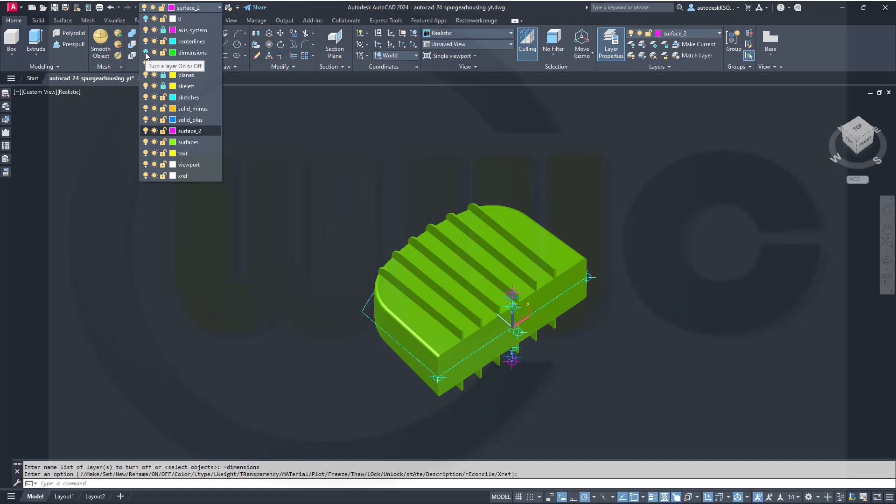Let's hide those solids here, since they're on a different 3D solid layer. Let's hide this one here. I will need a rectangle.

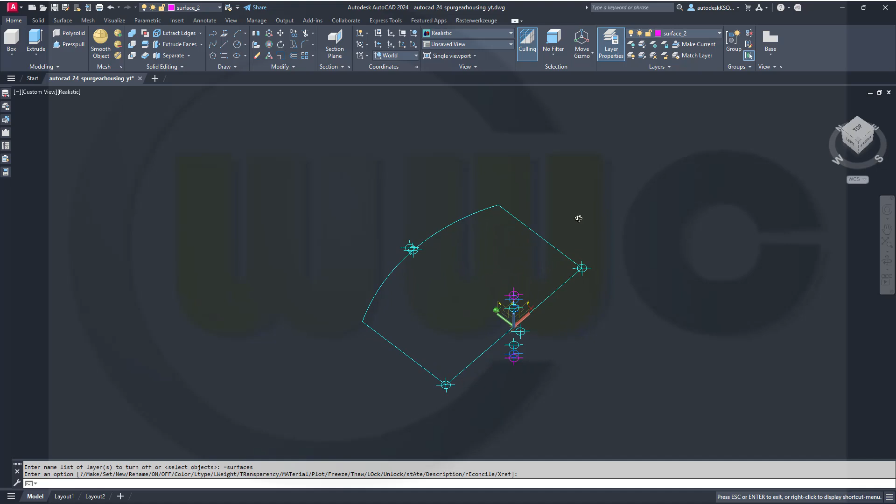My XY plane isn't oriented the right way, so let's rotate it around the x-axis by 90 degrees. Now I should be able to draw a rectangle, so let's go for our sketches layer.

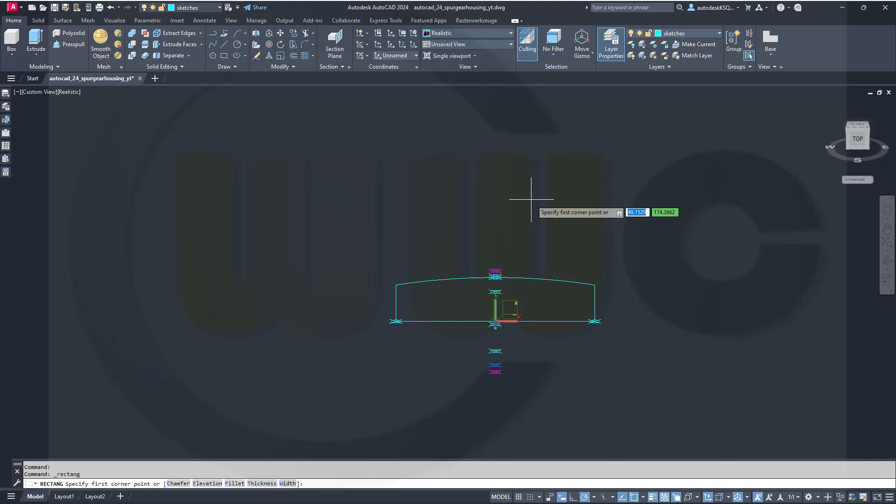Go for a rectangle. It should start at 0,0, and it should be 300 by 110.

Now this needs to move to a different point. Let's go for move, not copy but move. Right click, and the base point should be mid between two points, between this point and that point. The target point should be at 0,0,95, so hashtag 0,0,95.

Oh, I've got it wrong, it's minus 95. Let's move it again. Right click from this point in that direction, 2 times 95 would be minus 190 - but I've got the trace, so it's 190. Now it should be at the correct position.

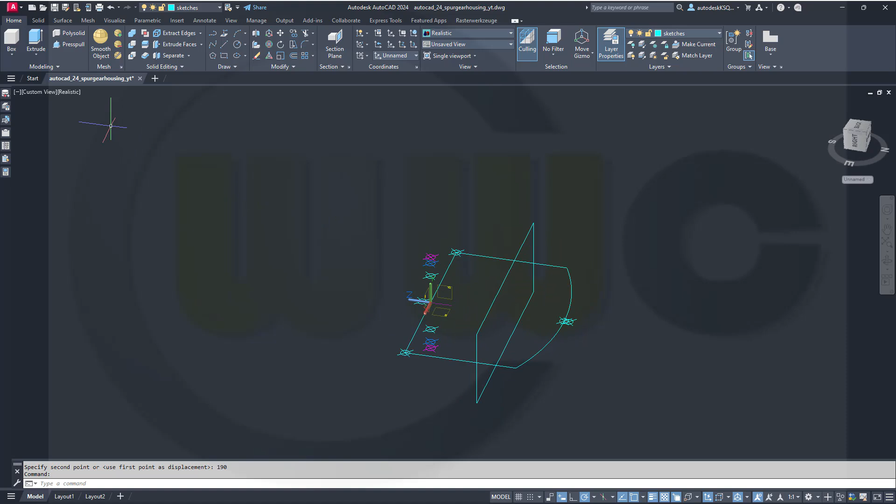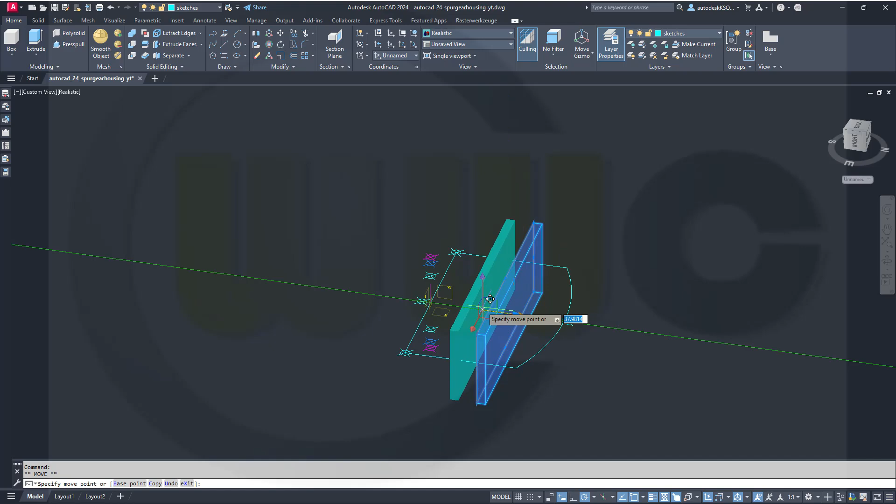Now let's make an extrude with that rectangle, right click, enter. It should be altogether 12, so let's go for 12. Then move it 6 millimeters to the opposite direction, which puts it at the right place.

Let's put this one here also on the hidden layer. Next rectangle should be...

Let's start again with a new rectangle at 0,0, and it should be 270 by 145. Enter.

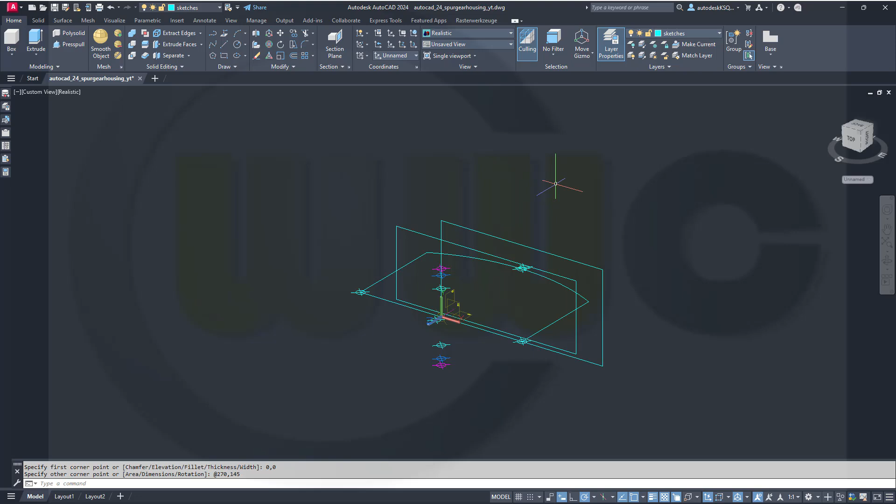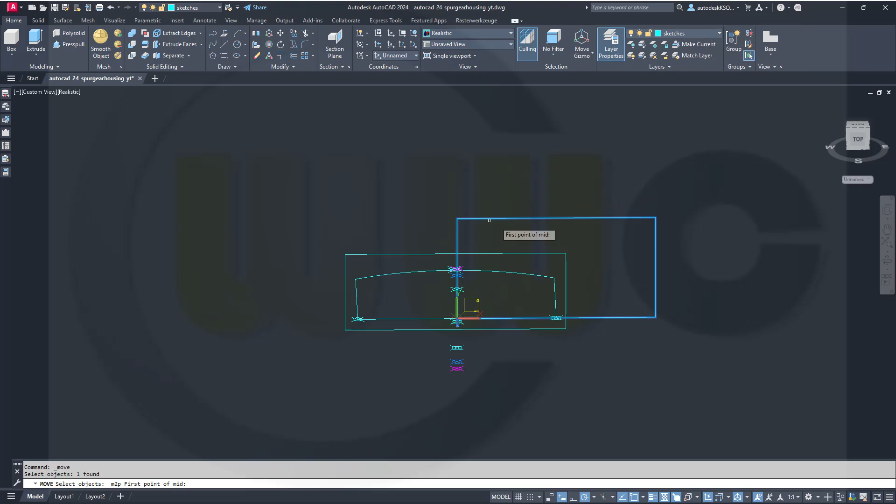Let's move this to the origin. Go for move, select the rectangle, right click, mid between two points - somehow it doesn't work, let's repeat. Select the object, right click, mid between two points, this point and that point, and push this one to hashtag 0,0.

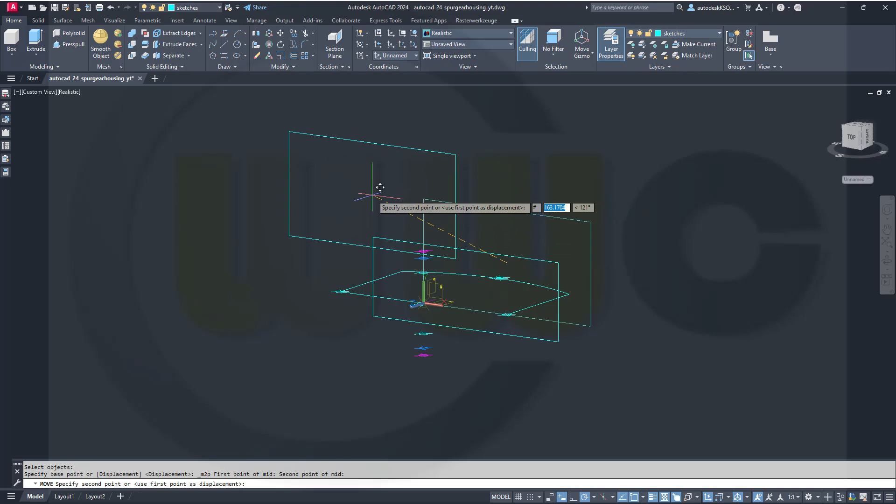Another extrude, right click, and in this direction 12 millimeter. Nice.

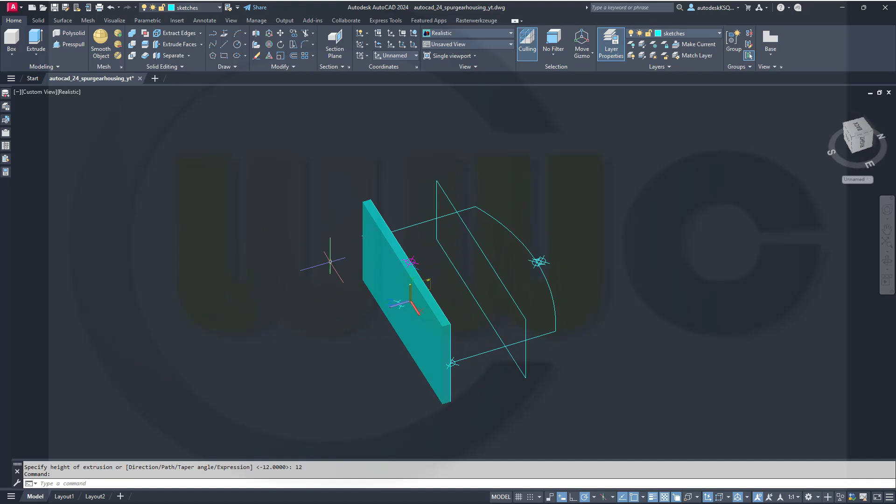I will need another rectangle, so let's move this maybe to - which one is visible? This one here, to that layer. I will need another rectangle, so go for another rectangle.

Should start at 0,0, and it would be 200 by 145. Let's move this - right click, mid between two points, this point and that point - and this should be at hashtag 0,0,12. Yep.

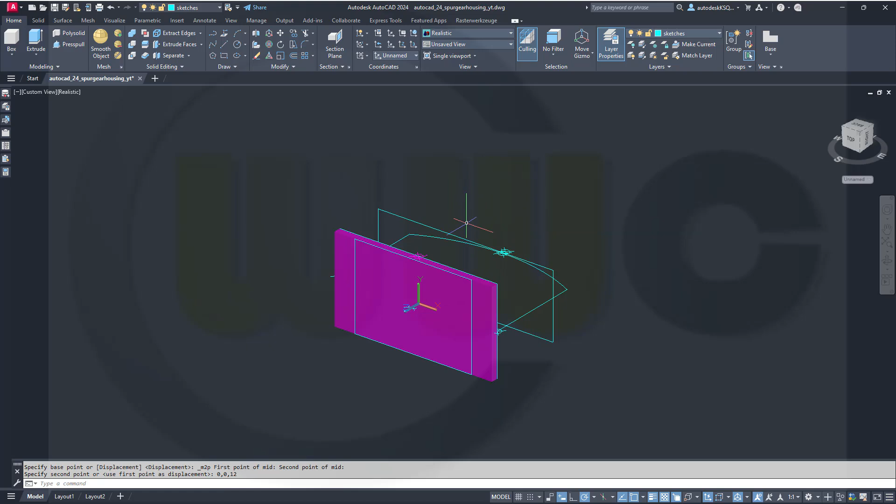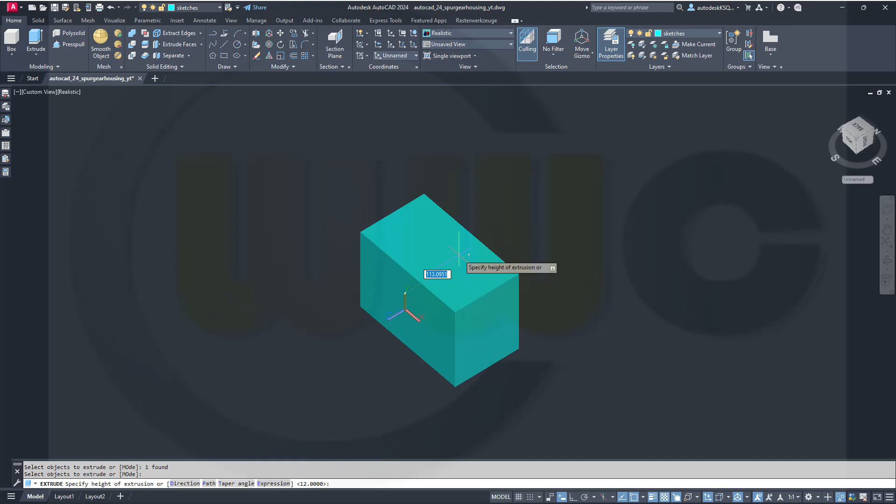Let's isolate that polyline for the moment. Make an extrude with that sketch. Right click, enter, in this direction 7 millimeter.

And I want to add a draft, which is called taper faces in AutoCAD. So let's go for taper faces. I want to taper this face here, that one. Right click, enter. Let's go from that point in that direction and add a taper angle of minus 45 degrees. That should do the trick.

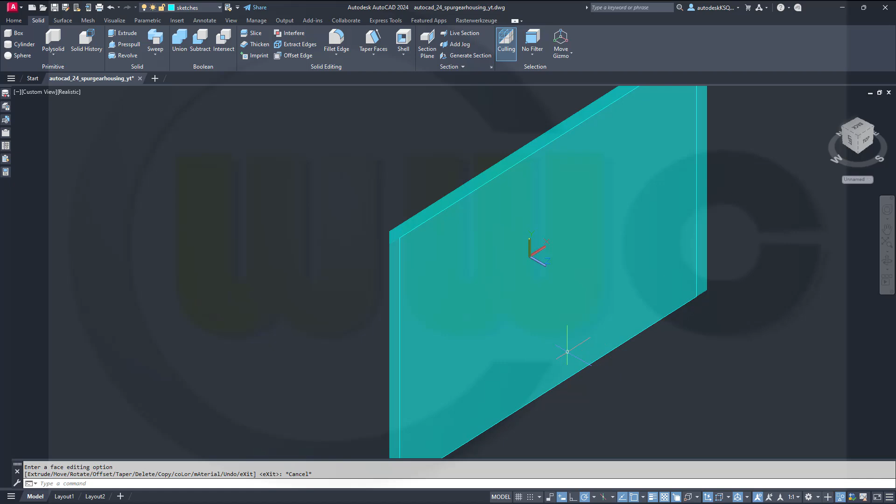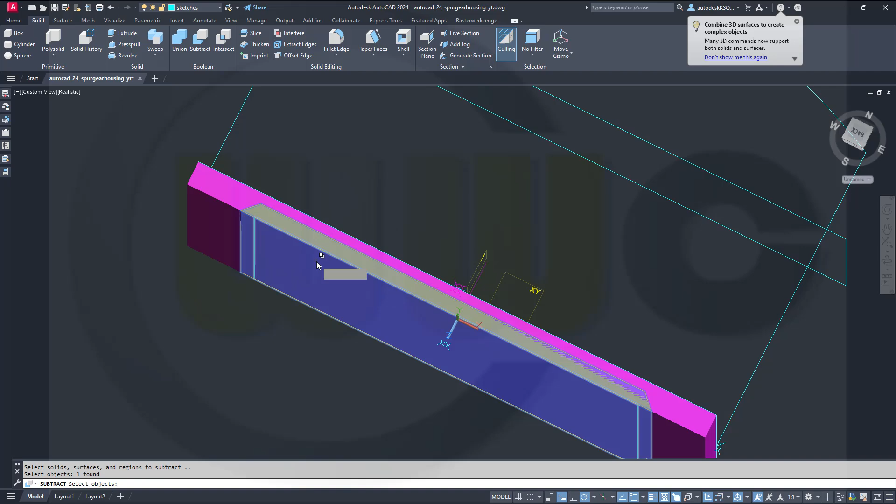Yeah, this looks pretty good. Now let's move this maybe to a different layer, the solid minus layer, and isolate it. Now I want to remove that solid from this solid. So go for subtract, select from this one, right click, that one here, right click. Nice.

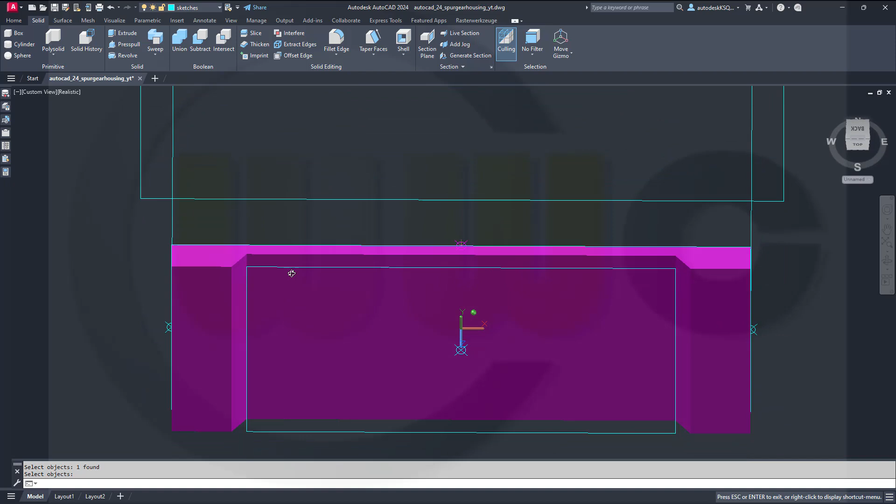Next I need to do the ribs. Therefore I will need to go for maybe a rectangle up here, which could go all the way, should be in the center, and I could do it with a rectangle from this position as well. Let's see, maybe switch to WCS, world coordinate system - yeah, this looks fine with the world coordinate system.

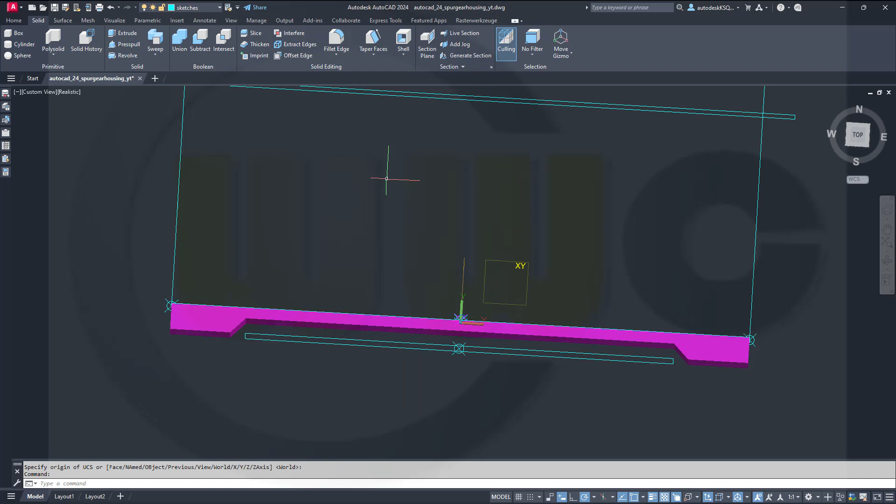This looks okay, so go for top view. I will need a rectangle, so go for home, go for rectangle, and this should be - that distance is...

270 - yeah, I could go for a little bit less, but it should be more than 200, so let's go for 270. That's okay. Let's start at 0,0, and that would be 270 by 12 minus 1, so 11.

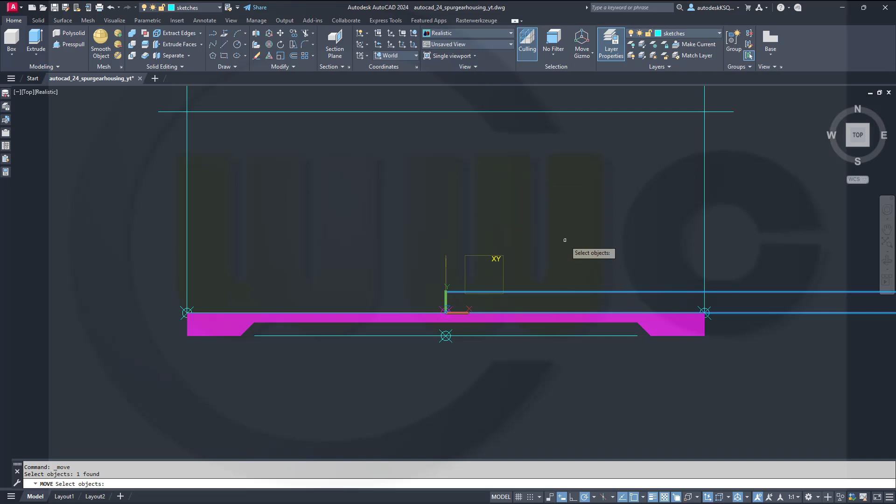Okay, let's move it. Right click. I need a base point, the midpoint of that line here, and this should be moved to hashtag 0,0.

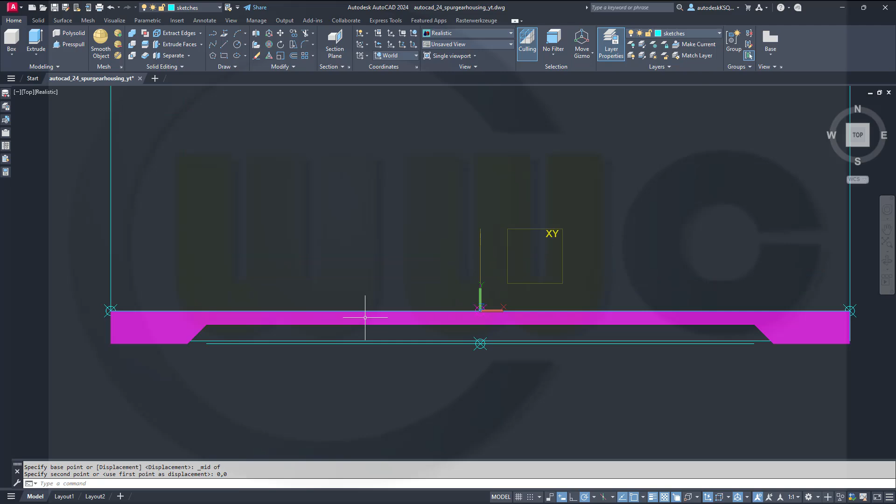Nice, let's make an extrude. Go for extrude, select that rectangle, the polyline, right click, enter, and it should be 4 millimeter.

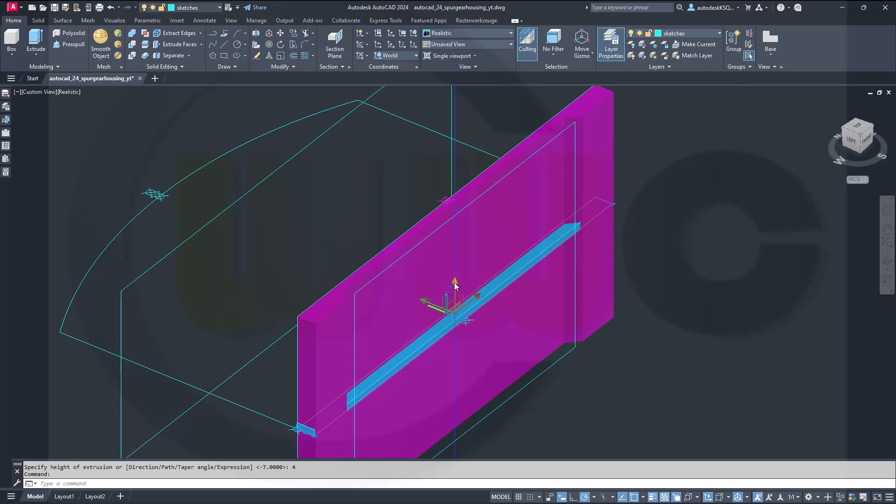Then select it and move it in the opposite direction, in this direction by 2 millimeter, which puts it right in the middle.

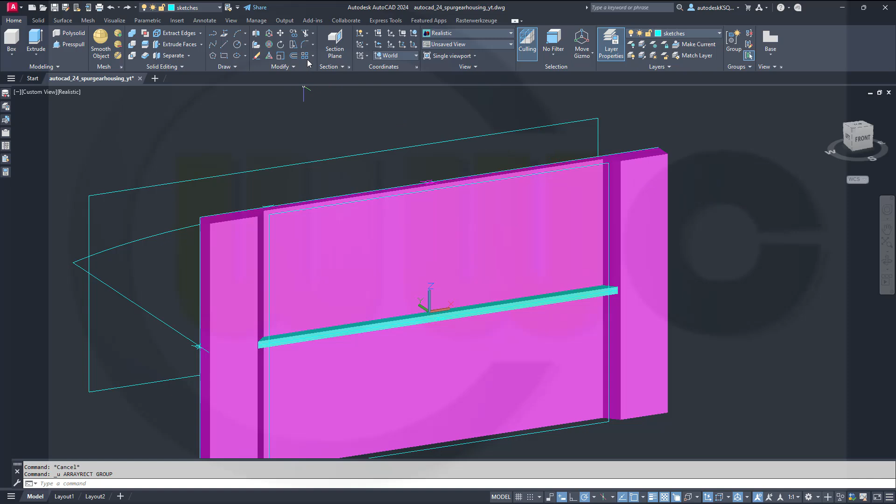And now I need a linear pattern. Can we center it? We will see. Okay, let's go for a rectangular pattern. I want to pattern that solid here. Right click, and this should be along the Z axis, so X would be 1, Y would be 1, and I want to go for 4 instances right here. The distance in between should be 6 millimeter.

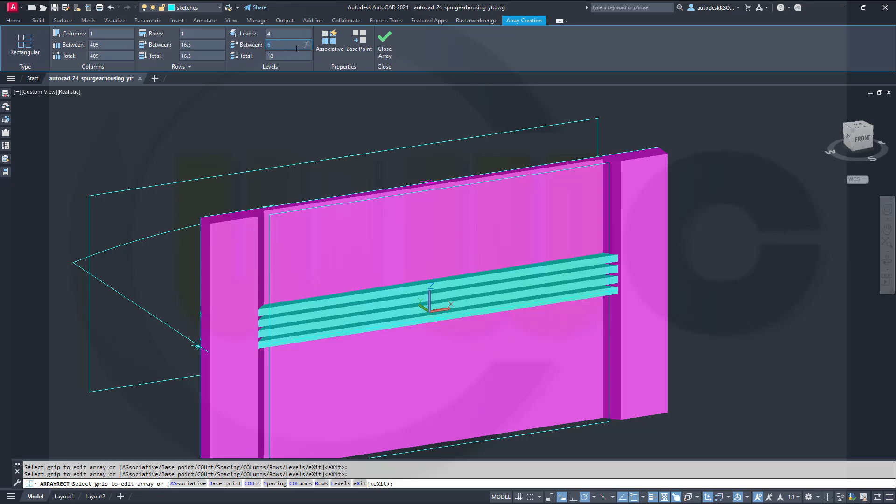Yes, not associative. Close that array, and then do the same thing in the other direction. Another one, select again that solid. Don't wonder, that's because of the delete object variable, so there are 2 right now at this position, but in the end I will make a union, so it doesn't matter.

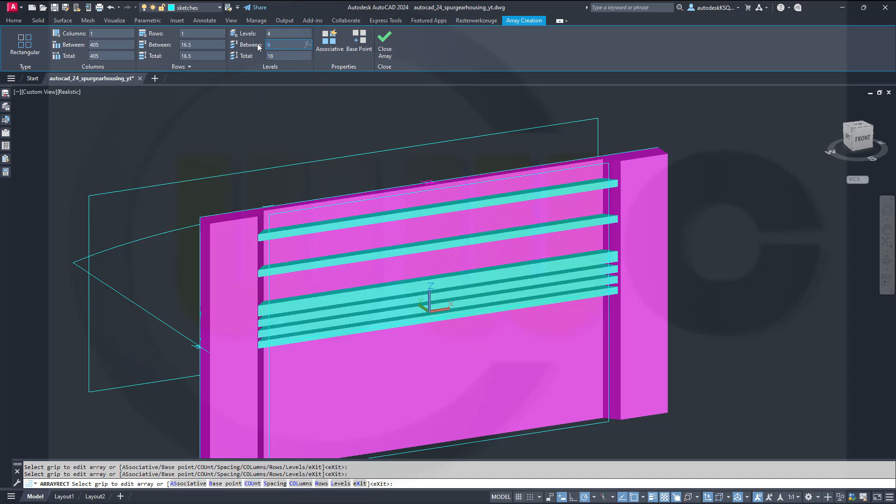Right click, again go for 1, 1, 4 in Z direction, and the distance is minus 6 in between. Looks pretty good, so let's close that array.

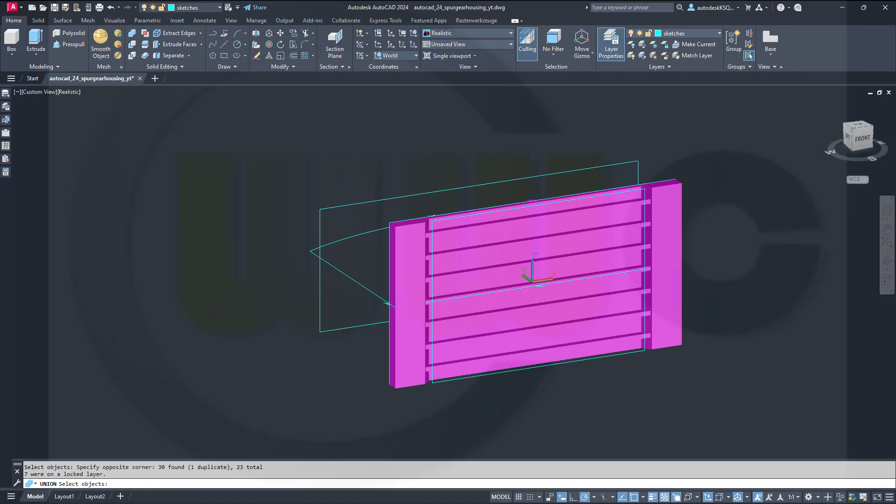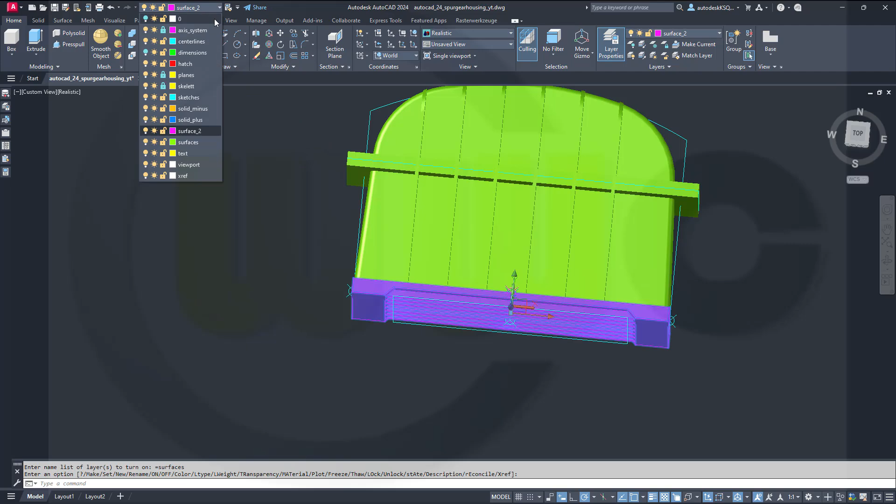And now I want to make a union between this one here, and let's select them like this. Right click, and I'm done. Looks good. Bring back that hidden one, and maybe move this solid onto the same layer, that would be this one here.

Nice. Hope this was helpful.